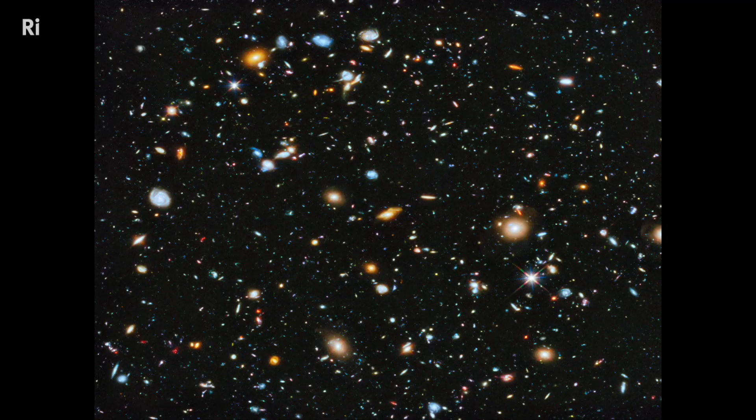The Big Bang - this is the moment at which the universe as we know it was born, and the moment at which each one of us was connected to each other atomically, and to the rest of the universe atomically. One of the fundamental laws is the first law of thermodynamics, and it really thinks big: that the amount of energy needs to remain constant.

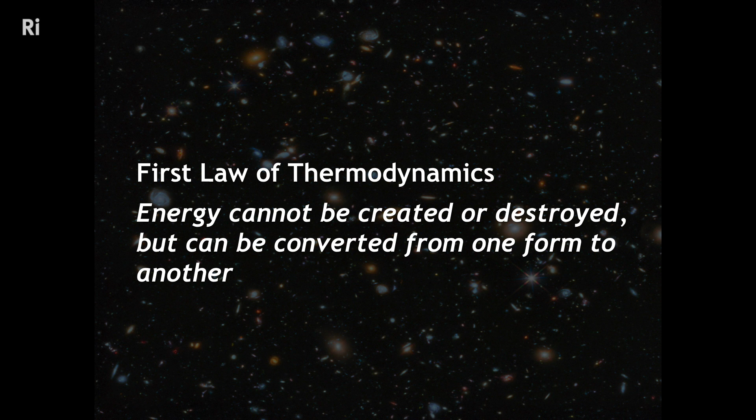It says that energy cannot be made or destroyed, but it can be converted from one form to another. And it's this idea of conversion of energy that brings us here tonight to discuss devices like batteries, that allow us to store energy in a chemical form and then transform that chemical energy into electrical energy as and when we need it.

So before we delve into the geography of battery cells, let's take just a short history of how these batteries were developed. The term battery was first coined by Benjamin Franklin.

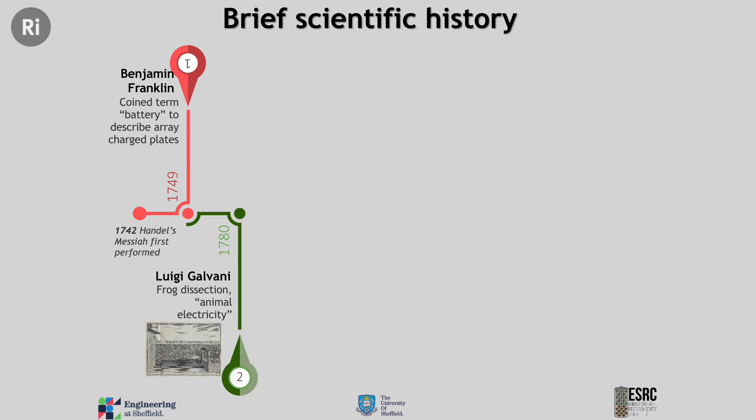And it was in the backdrop of US independence that there was an experiment carried out that really shocked the world. Galvani, an Italian scientist, had long thought that there was a link between movement and electricity. In one of his experiments, he connected a lightning rod to a frog's leg and then waited. When lightning struck that rod, the leg moved. This really shook the scientific world, and it also influenced Mary Shelley at the time, who was writing her novel Frankenstein.

Now, it was shortly after this that Volta started thinking: okay, Galvani thinks that this electricity is intrinsic to this frog - what about this electricity being intrinsic to metals?

And he started looking at combining different metals together, connecting them, metals like iron and zinc, to see if you could elicit some electrical current. And sure enough, he did. It was this discovery of bimetallic electricity that formed the basis for his innovation, the voltaic cell.

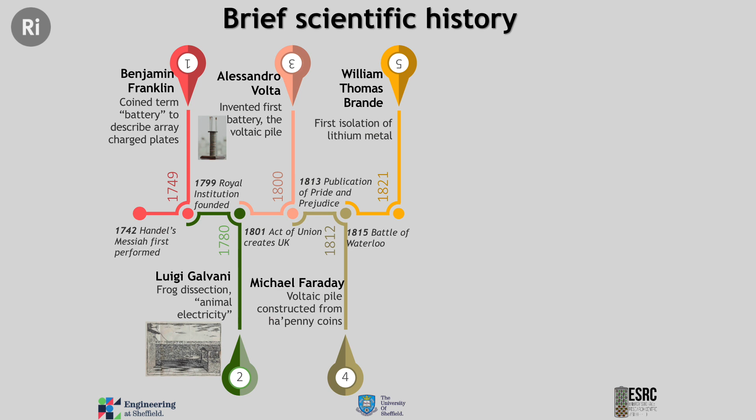This is a picture of a voltaic pile, and this is housed here at the Royal Institution. And this inspired Michael Faraday, who looked at voltaic piles and started to construct his own. In his first experiment, noted here at the Royal Institution, he constructed a voltaic pile from halfpenny coins.

And in 1814, Faraday visited Volta in Italy, and Volta presented him with a voltaic pile, which is the one that's housed here at the Royal Institution. It's such a beautiful example of shared scientific discovery and knowledge.

Around about the same time, again at the Royal Institution, was the first isolation of metallic lithium - lithium, this is the name that gives itself to the lithium-ion batteries that we use today. And at the same time in history, electromagnetism was taking off.

Inspired by this, Faraday looked into electromagnetism in a bit more detail, and conducted a lot of experiments to try and understand this further. In one of his experiments, which I show here, he had a long wire sitting inside a glass vessel that had a little bit of mercury metal in the bottom. And on the bottom of that glass vessel, there was a magnetic bar.

By connecting this setup to an external battery and charging that electricity through that wire, that set up a magnetic field along the wire. That magnetic field interacted with the bar magnet, and that set up this wire to move in a cyclical motion. That was the birth of the first electric motor.

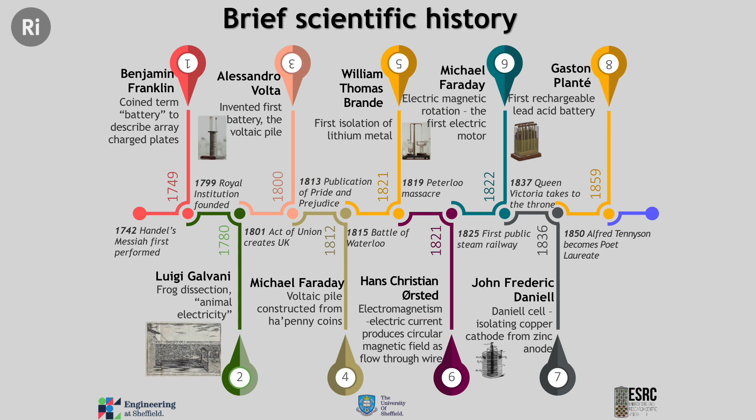Following on from that, there were further discoveries in batteries from John Daniell, a British scientist who had made the first Daniell cell. And then following on from that was the discovery of the first rechargeable lead-acid battery. This was by Planté, and this was used to light lights in carriages at the time, and of course now in cars it's used for ignition as well.

It was Faraday who had really looked at this link between chemistry and electricity. And looking at the work that he did and the work from Coulomb, we can really start to understand electricity and chemistry, and start to think about things in a quantitative way.

Here I've just shown an image of Faraday's lab here at the Royal Institution, and also a picture of Faraday giving his Christmas lecture in this spot, because I thought that was a really sweet picture to show tonight.

So Faraday, through his laws of electrolysis, had looked at how we can measure, we can think about electricity and think about the mass of materials that are involved in these sorts of transformations in electrolysis. And from that, we can work out quantitative information about our batteries. For example, the capacity of a battery.

We can think of that as a measure of the charge that the battery can store. And this really depends on the mass of what we call active materials. These active materials are things like electrodes, and it was Faraday that gave us those names: cathode, anode, ions, cations, and anions, and electrolytes. We can think of capacity as sort of the maximum amount of energy that can be extracted from a battery under certain conditions.

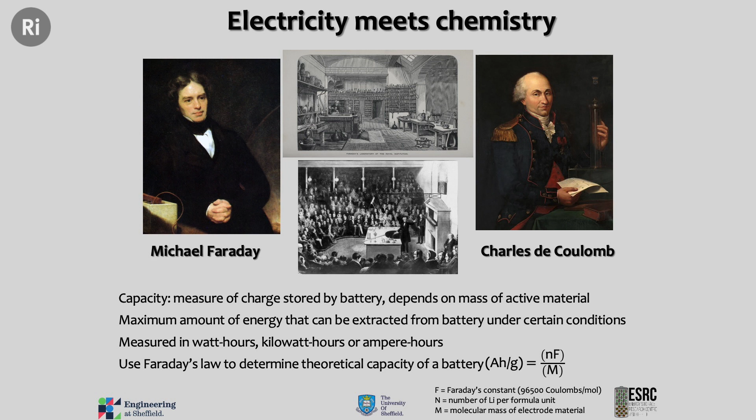And we can measure this in a number of different ways, and we're going to hear about that later in some of the next talks. And we use, in our own labs today, we use Faraday's law of electrolysis to work out what the theoretical capacity of a battery material may be. And we strive to work towards achieving that theoretical capacity.

So tonight's talks are really focused on lithium-ion batteries and lithium-ion battery chemistry. So we should look back over some of the key papers that brought about this wonderful discovery that powers our electric vehicles increasingly, our portable electronics.

And one of the first publications here that I'm showing is from Lewis, a very famous chemist, who had looked at the potential of the lithium electrode. And some work had been started then in 1913 on lithium batteries, but the first lithium batteries were not commercialized until the 1970s.

In the 1970s, there was the first publication of electrointercalation, so the movement of lithium ions into and out of a material. And this is by Stanley Whittingham, who'd looked at titanium disulfide materials.

This was very quickly followed by the pioneering work of John Goodenough, who had discovered lithium cobalt oxide, a material that's still used in our batteries today, which facilitates the movement of lithium into and out of these structures.

He'd done this work at the University of Oxford at the Inorganic Chemistry Laboratory, which you can visit and see this blue plaque dedicated to him. And in the 1990s, Sony commercialized lithium cobalt oxide batteries.

Very quickly followed reports of spinel-type materials, manganese spinels, and iron-based phosphoolivine materials. And this sort of research area remains extremely vibrant and exciting even today.

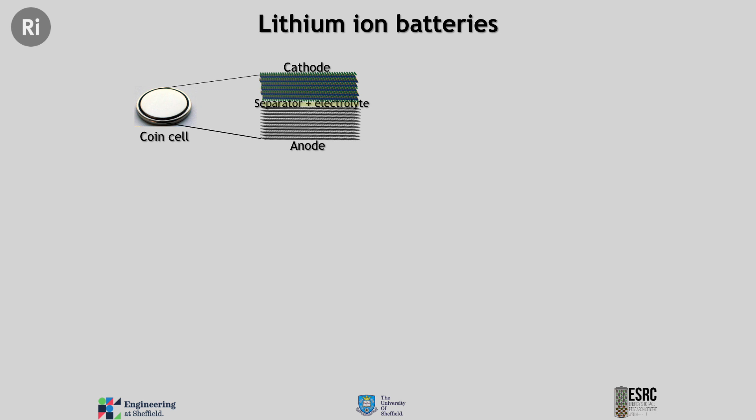So let's look at a lithium-ion battery cell in a little bit more detail, and we can break it down into its component parts. So this is a picture of a typical coin cell, which you may have seen in some of your devices. It's made up of a cathode, which is our positive end of the battery, an anode, which is the negative end, and then there's a separator that keeps the two apart. And between those, there's something called an electrolyte.

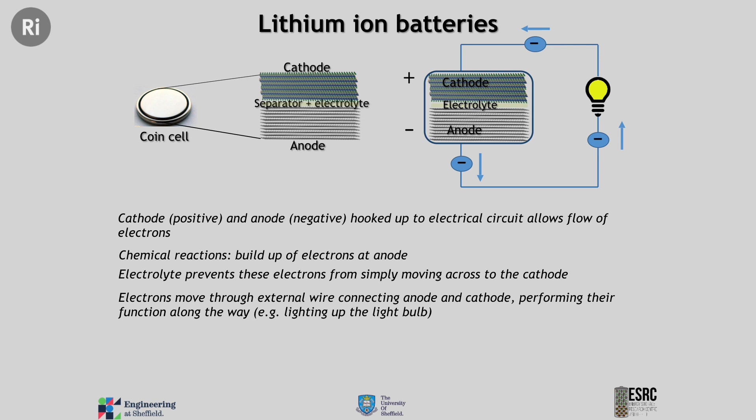What does the electrolyte do then? The electrolyte is what permits the flow of lithium ions in a lithium-ion battery. So it's ionically conducting, but electronically insulating.

Each one of those elements plays a specific role in that battery. The nickel increases the capacity. Remember, that's the charge that our battery can store. But when you increase that nickel content, there are some challenges and complexities in the synthesis of these materials.

The manganese provides structural stability, but it does so at the expense of the capacity of the battery. And then finally, we've got cobalt, which improves the rate performance, but as we're going to hear later on, is costly, and there are ethical concerns with mining cobalt.

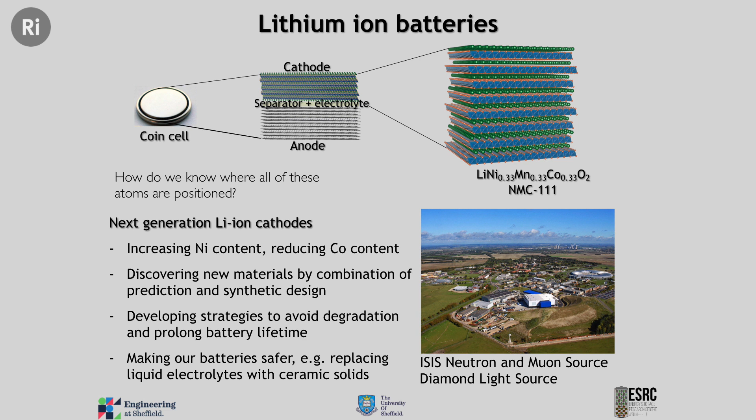So what can we do to try and mitigate these degradation processes? When we look towards the next generation of lithium-ion battery materials, and when we look at cathodes in particular, where are we moving to? We can increase the nickel content of these battery materials to try and up that capacity, try and reduce the cobalt, maybe even completely eliminate it. We can try to discover new materials by combining computational insights from calculations with synthetic design procedures to come up with a new family of materials. We can design strategies that avoid degradation and prolong battery life. And how do we do that?

Well, sometimes we can form a protective coating around our NMC material, and that will protect it from some harmful species that might erode it over time. Or, as crystal chemistry engineers, we can start to mess around with the atoms that are present, take one or two out and replace them with an element that might keep that framework structure nice and stable over multiple cycles. We could also look at making our batteries safer. These electrolytes I've talked about up to now are liquid-based electrolytes, used in your mobile phones and laptops. We could maybe move from liquid electrolyte systems to solid electrolytes and ceramics that provide greater safety and allow you to operate at higher voltages.

So as we're moving to these next generation of lithium-ion cathodes, we have to start to think about where we're going to source these raw materials from. And I think this is the perfect time to start handing over to Simon, who's going to discuss the source of materials in a bit more detail. Thank you. Thanks very much.

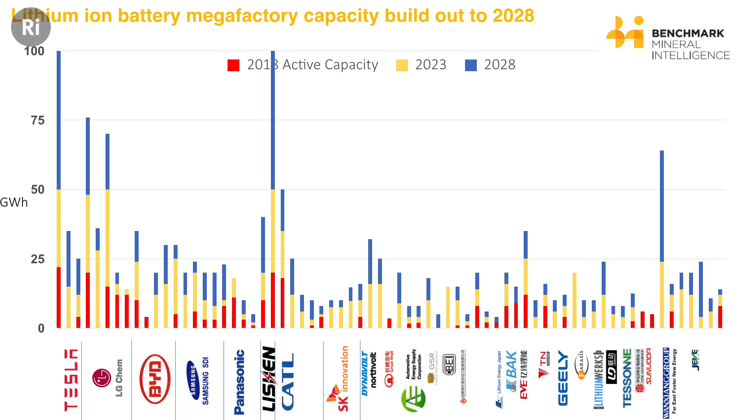This is where we're going by 2023. This is where we're going by 2028, and more of these plants are being announced as we speak. One last week was announced in India, which we haven't got on this chart. So that will intensify as the world needs more batteries. How many electric cars, pure electric vehicles, does that equate to? It's about 22 to 24 million. So when you look at these big announcements, like VW this morning announced they want to build 70 pure electric vehicle models by 2028, you realize that isn't a lot of batteries. We're going to need a lot more.

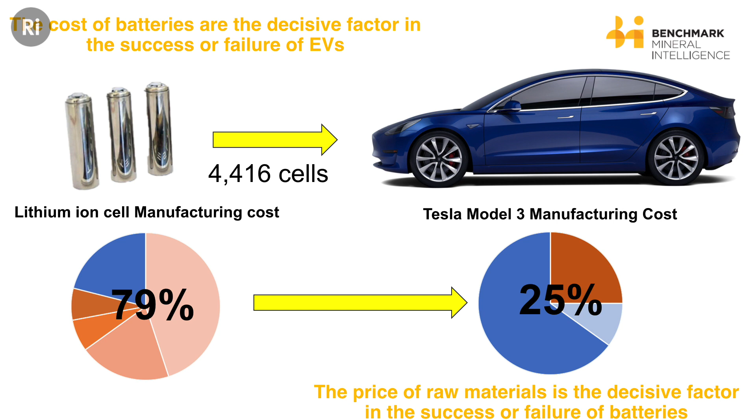So big statement number 2: the lithium-ion battery supply chain are the oil pipelines of tomorrow. What are the raw materials to watch? We like to call them the 4 horsemen of the ICE apocalypse. That's the internal combustion engine, ICE, which is the cars on your road.

Actually, the majority of feedstock now comes from traditional hard rock mining in Australia. That's your traditional mining where you can get a rock concentrate. That gets shipped to China, and is then processed into battery lithium within China.

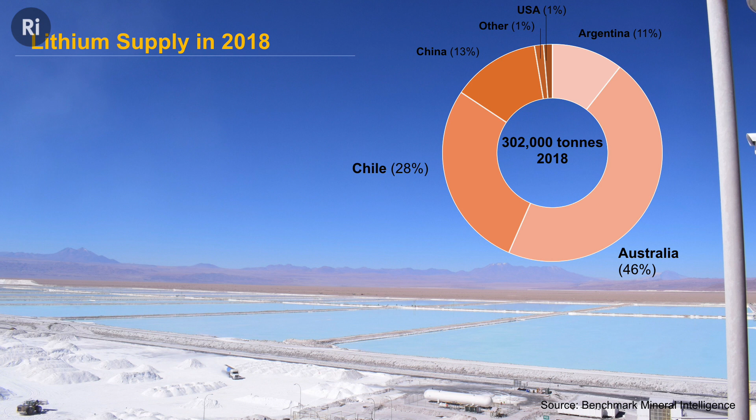Again, the key thing to understand is lithium is a very small industry. Last year, 300,000 tons, give or take, were produced. LCE, this is lithium carbonate equivalent. But all the commodities you're used to hearing about, coal, copper, oil, are in the millions or tens of millions of tons. So lithium needs to get to well above 1 million tons by mid-2020s to keep pace with demand. I don't think it's going to do that, but the point is it has to go from niche to mainstream, and it's not a commodity, it's a specialty chemical, which complicates the supply chain a little bit more. So this is lithium demand.

This is a big boy, Andy Miller. I put this in because his mum's here tonight. Andy Miller isn't with us, he's over in the US, but I thought Catherine would like that.

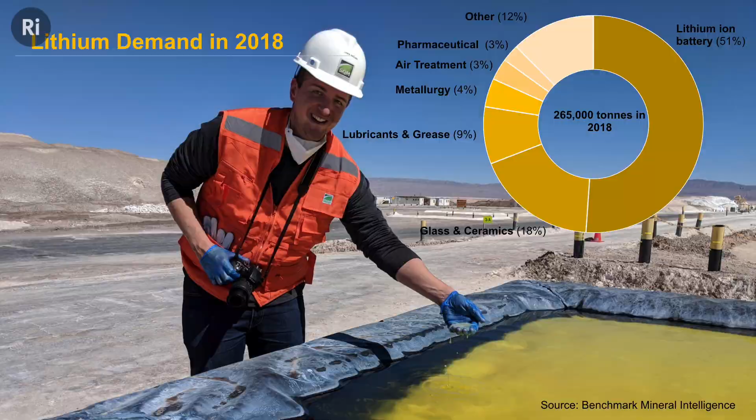Again, from a demand perspective, look to the right-hand portion of this pie chart. Lithium-ion battery, 51%. It's important to note that now with these raw materials, it's the same for cobalt, it's similar for graphite, the battery end use is now taking over the majority of the supply chain.

Once you go past that 50% mark of this mineral being used in batteries, the industry, the producers, the supply chain recalibrate everything they do towards lithium-ion batteries. That wasn't the case before, so that's something to bear in mind.

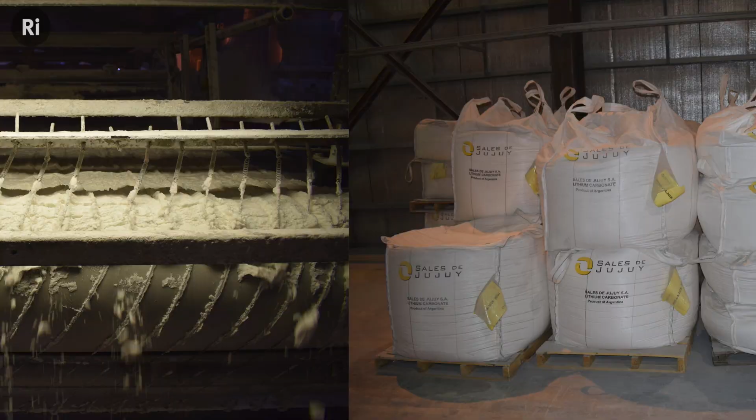Then they take the chemical out the ground. On the left, they turn it into a white powder, effectively - that's what lithium carbonate looks like. On the right, they bag it, and then send it to the Tesla Gigafactory, for example, where they mix it with the other cathodes, the NCM or NCA material, and then it goes into a battery.

The reason it's complex and difficult is there were 5 stages - more importantly, there were 15 steps to get lithium out of the ground and into an electric vehicle. So there's 15 steps for it to go wrong, 15 ways to qualify that material, 15 hurdles it has to go over, so it's not straightforward.

As a result, price volatility is now the norm. Lithium's price has increased 4x. It's come off since, but still remains high. And that's the same for cobalt and other raw materials going into a battery. There's a lot to talk about. Thank you for your time.

So really picking up from where Serena left off, all of that wonderful electrochemistry that drives the storage and release of energy takes place in the form of a rather dull-looking particle about 5 microns across that's kind of black or grey. I've got some examples here. It's really nothing special to look at if you're not looking at it through a microscope. And if you wanted to try and get some power out of that, attaching leads and crocodile clips to those tiny particles is a bit tricky.

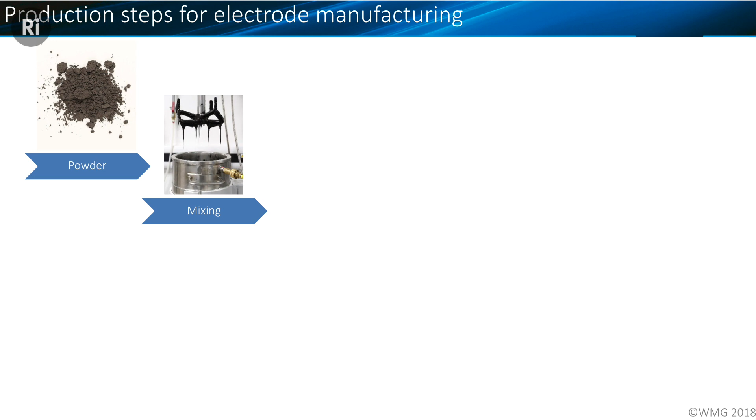So what we do first is we take our powder and mix it into an ink, and we mix it with carbon black typically, which is a nice conductive additive that links the electrical current all the way from the particle to the foil. And we'll mix in some binders - that's basically an adhesive that makes the carbon stick to the foil.

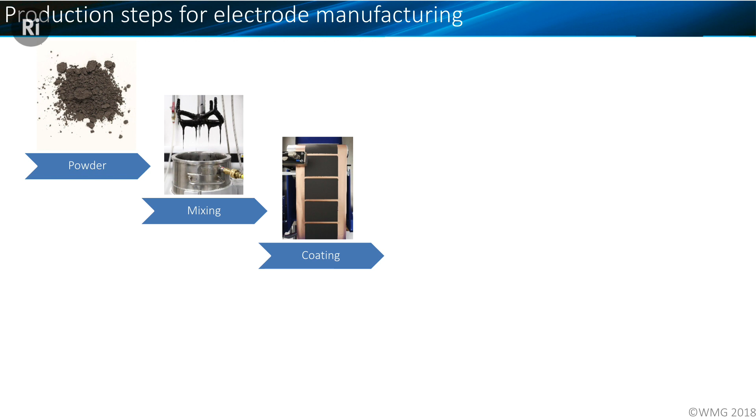Then we use a solvent which makes it liquid so that we can start to print it, and we're going to dry off that solvent. As we dry the solvent off, it's going to leave porosity behind it, and that gives us that beautiful microstructure you saw earlier. So we coat - I'll show you a video of that in a moment - on a reel-to-reel coater. To make the kinds of volumes we're talking about, this has to happen at very high speed. I'll show you some more details in a minute.

This is something that has to run on a continuous process line at about 120 meters a minute to be able to make the quantities of batteries that we need. And then we have to dry off the solvent, and that actually takes a tremendously large amount of energy.

The solvents we use for our anode are typically things like water. They're quite benign. But at the moment, we don't really have any good solvents for cathodes that aren't fairly unpleasant. We use a substance called N-methylpyrrolidone. Brilliant solvent, really horrible for health. So we have to be very careful how we control that in an industrial environment.

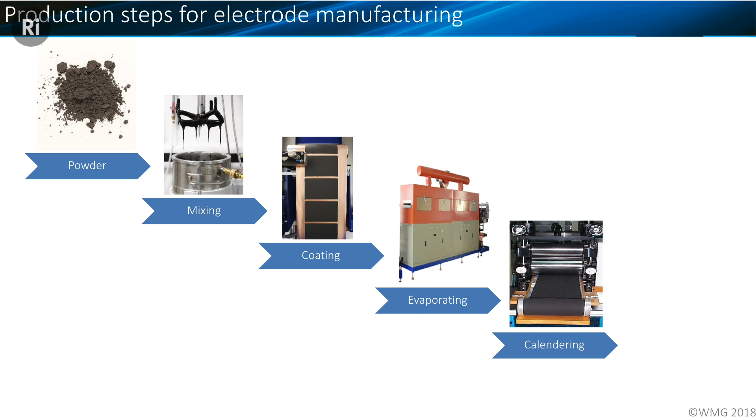And then we do something called calendering. We run that very carefully coated microstructure through a world's biggest mangle. What that does is compact it all down and get a bit more density in there, to give us a bit more energy storage, before finally we chop it into pieces.

Once it's chopped into pieces, we can assemble it into cells, and we can assemble those cells in one of two typical formats. We can cut them into big sheets, like rectangular sheets, typically about the size of an A5 or A4 book, and stack them like a lasagna. We're trying to get as much contact area as possible between the anode and cathode sheets, with separator layers in between. If I cut them as rectangles and stack them lasagna style, I get something I call a pouch cell.

The other way we can do this is print it onto very long, thin strips and roll those strips together. That makes a cylindrical cell, of the 21700 sort that you saw in Simon's presentation.

But what we've got inside this cell, if I was to open it up, is our roll of materials, all tightly packed. Don't do this at home, by the way. At home, this is full of caustic electrolyte, and it will do you no end of harm. Do it when you make these in the lab for fun, and you don't put the electrolyte in.

But what you see in here is a roll, and in that roll, we've got the layers of anode and cathode material separated by this white separator material, a polymer separator material. And that simply gets dropped into the cell can.

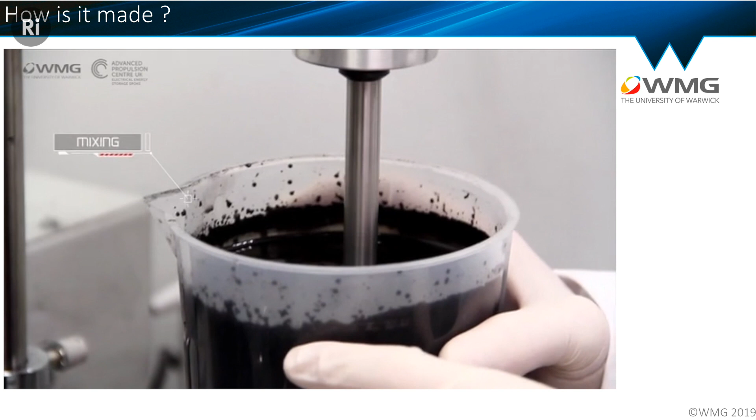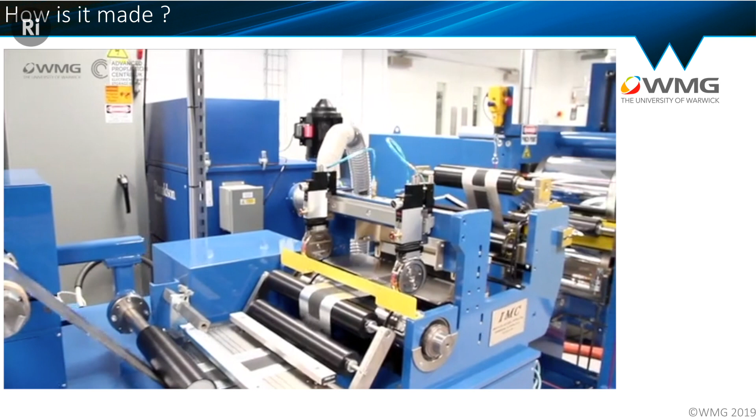Thank you very much. So what you can see here starts off with the mixing process. This is done in a lab environment. This is not what a factory looks like. So we're mixing up that ink, which is a bit like a kind of molasses type consistency. We then pour it into a reel-to-reel coater, where we lay that coating down onto a roller. We draw the foil up against it, and that draws off the coating to give us the coated foil that we're looking for.

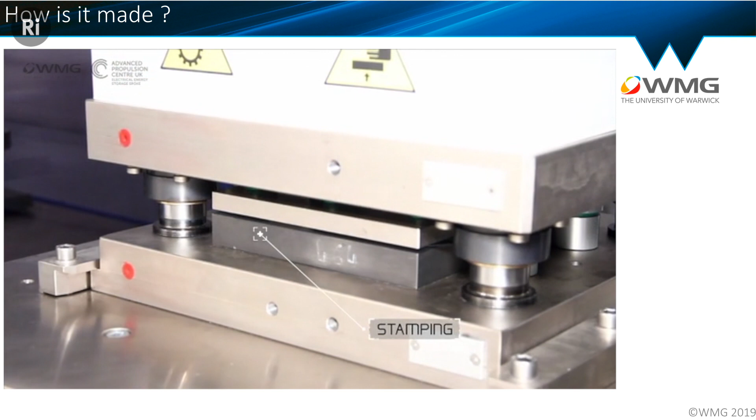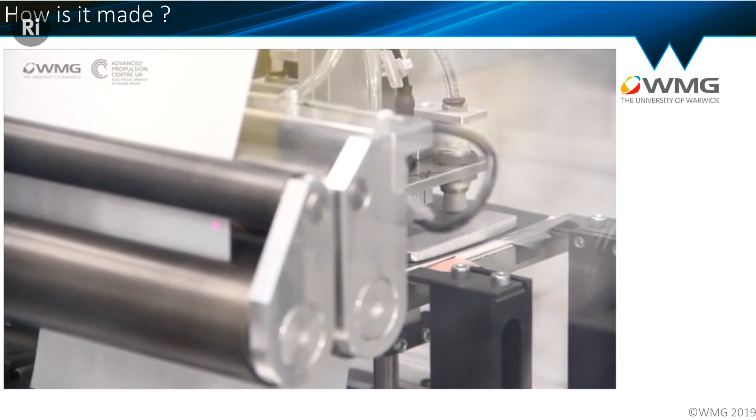The drying actually takes place in a closed cupboard that you can't see, and then we stamp the materials. We use a robot to assemble them because the alignment of those anode and cathode foils is absolutely critical to the quality of the battery. It's one of the things that can cause it to fail early in its life. We then seal it into a material which is actually very similar to a coffee bag. Coffee bags resist moisture for about 3 months.

That material resists moisture for about 15 years. And having done that with the electrolyte, we then take the thing off, ready to form. In our laboratory, we can make about 20 cells a day using researchers.

If you were to walk into a Gigafactory, you'd see individual lines producing something more like 20 cells per second. And that's one of our challenges.

We don't just put those cells directly into the car. We first have to put them into sub-assemblies which are manageable. So we take our cell, whether it's a pouch or a cylinder, and we assemble them into things called modules. These are really just sub-assemblies. And what we're trying to do at this point is to keep the voltage of each of those sub-assemblies below about 60 volts, so it's relatively safe to handle.

We're trying to keep the mass down to about 50 kilograms or so that it can be handled in a factory environment. And ideally, we want that module to be reusable across many different electric vehicle types so we can get some economies of scale out of its manufacture.

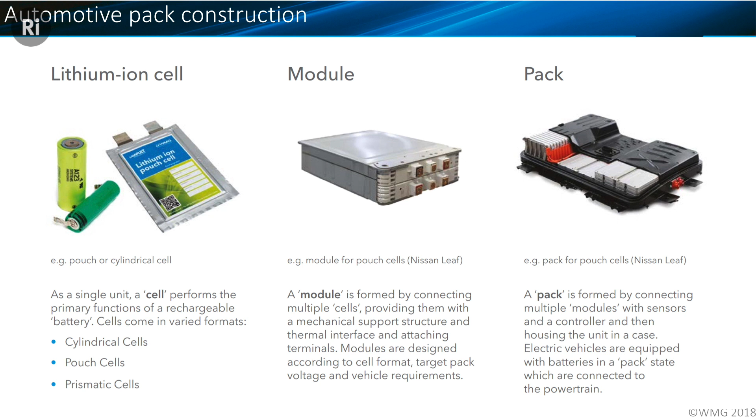Then we'll join those modules together to make the battery pack. The battery pack, you can see the Nissan Leaf one on the slide behind me, typically covers the whole floor of the vehicle, and typically weighs somewhere between 300 and 900 kilograms. So it's a fairly substantial piece of equipment. And then that gets bolted underneath the vehicle, typically on the production line for the car.

The fact that that pack is large, it's heavy, it's hazardous goods, means that there's a lot of benefit to doing the assembly of that very close to where you do the assembly of the car. And that's important for us, for reasons I'll come back to in a moment.

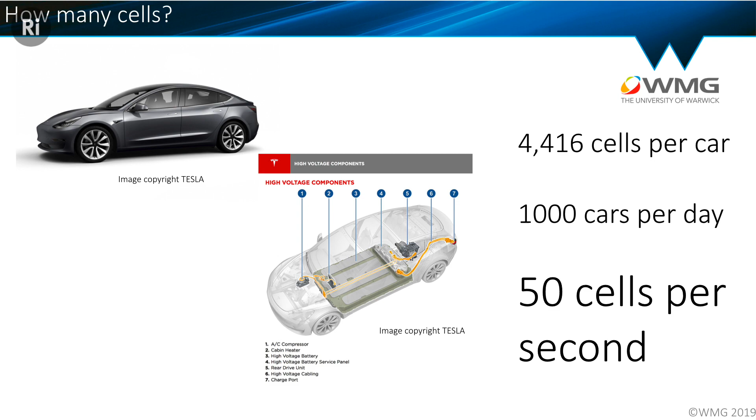As Simon said, our Tesla Model 3 has about 4,400 of those little cylindrical cells inside it. And Tesla's finally reached its magic number of about 1,000 cars per day in manufacture. If you want to multiply that up, that means that just to produce one model of car, that factory has to produce 50 cells every second.

And given that, as well as the Model 3, they're also making the Model S, the Model X, and a whole bunch of other stuff besides, the Gigafactory that's there doing about 20 gigawatt hours today is doing about 125 cells per second.

The fastest miniguns that get connected to helicopters by the RAF for shooting at targets, the very fastest that have ever gone to production are about 125 rounds per second. It just gives you an idea of the rate these factories have got to be operating at. And that's how you get to things like the Gigafactory.

It takes about 4 billion of investment just to get to the point we are today, to do 20 gigawatt hours. And as Simon said, this is only about a third of what Tesla want to be doing in the long term. And that's already a 200,000 square meter facility with about 3,000 staff. So it's a fairly significant industrial endeavor.

It's also a massive commercial opportunity, whichever way you look at it. The reason the UK is interested in all of this is that the UK at the moment has a very good industry in cars, and particularly in making engines. We make about 1.7 million vehicles and about 2.4 million engines every year. And the engine is about a third of the value of the car, the bill of materials cost.

But when we move to an electric vehicle, we replace the engine with an electric motor and some power electronics, and that costs about the same as the engine. Then we put a battery in place, and that costs typically 3 to 5 times the cost of that engine, and then we put the rest of the car on top of that.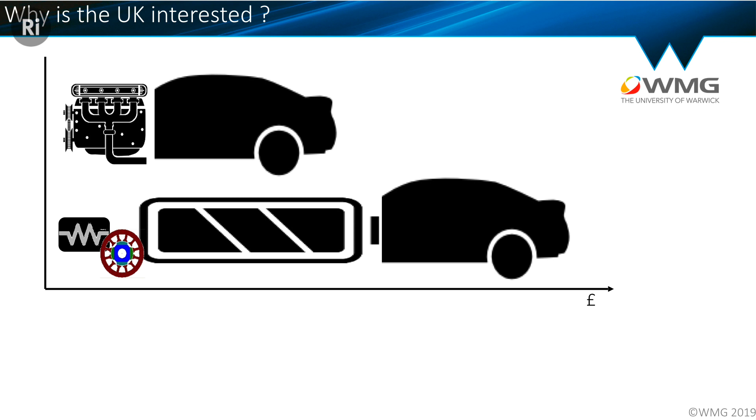So there are two things you'll notice. The first is the total cost of our vehicle has gone up significantly. The second is that nearly 50% of the bill of materials cost for a long-range electric vehicle is embedded in that battery. If we see that as a bought-in component, that's outsourcing an enormous amount of the value creation that happens in the car industry in the UK today. So economically, as well as technically, it's important for that to be a component that we have the ability to deliver.

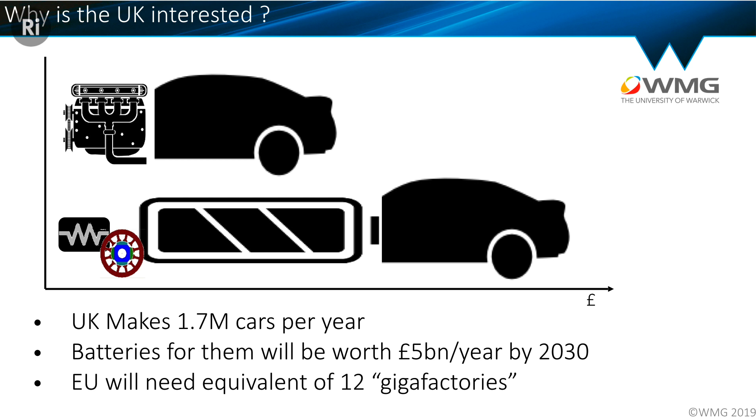If we look at the kind of volumes that Simon's slide showed, around what we've got to get to by 2028, 2030 across the EU, we're going to need the equivalent of about 12 of those gigafactories at the size they are today. To supply the UK industry domestically, that's space for about 2 to 4 gigafactories of that size. Actually, there are some good arguments that economies of scale suggest you want smaller factories, probably about 10 at half that size. So that's a big opportunity for the UK.

In response to that, the Faraday Challenge and the Faraday Institution, which has sponsored today's event, has been set up to accelerate the UK's research efforts, our innovation, and our industrialization of batteries, going from the achievements of Goodenough in the 1980s as the inventor of the lithium-ion battery, to try to place us in the position where we've got large-scale manufacturing and exploitation of that technology coming from the UK.

And that journey takes place over an enormous range of length scales. The kinds of scientific development that Serena's talking about typically happen at the scale of milligrams or grams in a laboratory. As we look to see whether they work in the context of a cell, we work in laboratories like ours at the kilogram scale, building 20-odd cells a day. And by the time we get to the scale at the far right-hand side, which is our gigafactory, that's a kiloton per year of materials that we're processing.

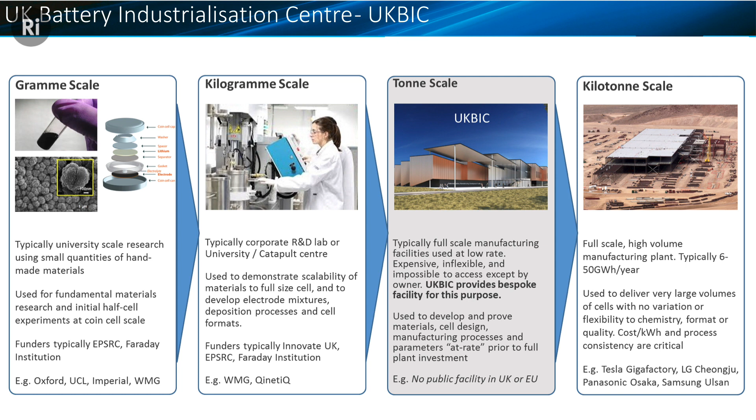To make that jump from laboratory into full-scale factory, what you need is the ability to trial those manufacturing processes. If you're going to be making 50 cells a second, you want to make sure you're making them right, because if you're losing money off them, making more is a really bad idea. So what we need here in the UK is a facility that lets us look at that manufacturing journey as well as the scientific journey.

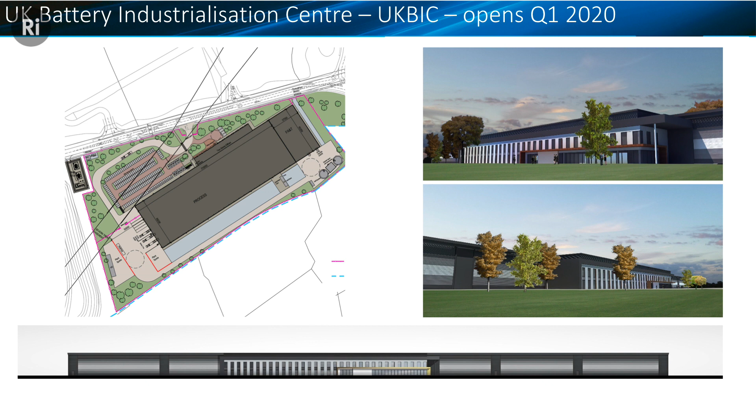And a part of the Faraday Challenge is the construction of something called the UK Battery Industrialisation Centre, being built in Coventry, not very far from my own institution at Warwick. That's a 20,000 square metre facility, about one-tenth the size of a gigafactory, so it's still a pretty significant endeavour. It'll have the ability to do about 1 gigawatt hour per year manufacturing capacity.

That allows material suppliers, manufacturing companies, and car companies to start designing cells, designing new manufacturing processes, and bringing new materials forward to market. What we hope is that this gives a springboard in the UK for a large-scale manufacturer to set up, to link into the R&D and development efforts here, and start to supply some of the major OEMs we've got based in the UK. And that, I hope, is a good opportunity to hand over to one of the major OEMs we have here in the UK. Thanks, David.

Thank you very much, and thank you to the previous speakers. I think this is perhaps one of the most exciting bits of the presentation this evening - it's really how the battery comes to life. So we've seen the raw materials, we've seen what a battery is, we've seen how it's made, and we've seen what it will take for a Gigafactory to come to the UK.

My job at Jaguar Land Rover - I'm Global Purchase Director for Electrification. My role is very much linked to what Dave's just been talking about, buying the batteries from these Gigafactories all over the world on behalf of JLR. The picture behind me is the base of an I-Pace. If you took off the body, the seats, the doors, that's what you'd see left over. The main bit in the middle is the frame, which contains 36 modules. They then contain 12 pouches, which is what's driving the overall 90 kilowatt-hour battery you can see in there.

So just to start with a question - how many of you in here this evening have ever driven or travelled in an electric vehicle? Okay, that's not a fair...

Anybody want to shout out, what was your experience? What did it feel like to be in an EV compared to a normal petrol or diesel? Silent, quiet, fast - yep, exactly. Those are all the words I would certainly associate with driving an EV. The silence is really noticeable, that sense of peace you can have in an EV. There's certainly none of that stop-start you get, particularly in city driving at the moment. And that sense of response - they are incredibly responsive due to the nature of the design of the vehicles.

It is quite hard, as I say, to describe that, but I've got a video which hopefully will give you a sense of what it's like to have an EV.

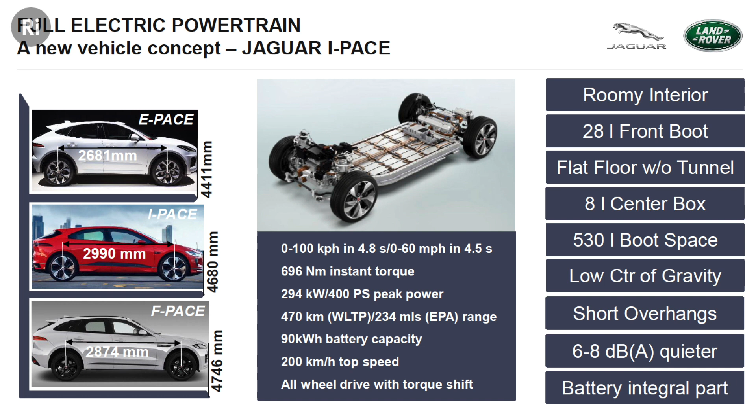It's also significant in terms of the amount of roominess that we were able to drive into that vehicle. How did we get to this point? Really, it demanded a significant change in the way that we engineered this vehicle within JLR. We're used to developing vehicles that have internal combustion engines, petrol or diesel, which then drive, in effect, a passive driveline. When it comes to an EV, we had to change the entire way that we engineered the vehicle, so it meant we had to have an awful lot more interaction between each of the centres of excellence across the organisation.

It meant that we had to integrate the powertrain into the whole vehicle. It's no longer an engine and individual drivetrains. We've got the battery pack that then drives the electric drive units that are integrated into the front and rear axle to deliver the performance you could see there. The high voltage batteries are integral into the vehicle dynamics, and they are scalable, as mentioned in some of the earlier presentations. Having those standardized modules is really going to be key for us as we move forward, looking at how to optimize the cost of these vehicles in the future.

In addition, we have to be very careful with the energy management of these vehicles and make sure that we can optimize those and have a fully integrated system so that the vehicle can be primed before starting use, or dynamically managing the battery output throughout the entire use of the day.

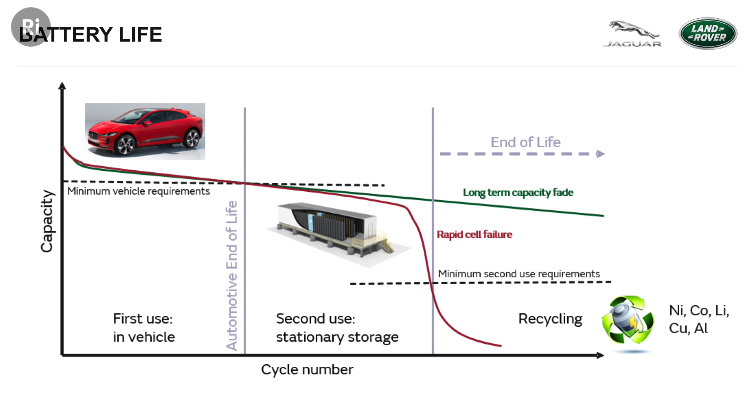And a battery - we've spoken earlier about what happens to the batteries. We've seen that some of the materials included in the battery pack are particularly challenging for us. The battery has a standard life that we can see here. The first use will be in the vehicle, and that will last for a particular amount of time. In the I-Pace, we warrant them for 8 years, 100,000 miles, whichever comes first. At the end of that time, it doesn't mean it then has to automatically go and be recycled.

And then it gets to the point where there is a challenge in terms of whether we go for recycling, taking those materials - nickel, cobalt, lithium, copper, aluminium from the busbars. Those materials all have a value, and it's important to take those back in, working with our partner suppliers, and feed them back into the supply chain so that we're not having to go and get virgin materials, and we can develop a closed loop system, which is ultimately what we're aiming to do.

In terms of future opportunities, I believe this is the first in a series of lectures here at the Royal Institution, apologies - the Faraday lecture. There is a further series of lectures which will go on about what EVs mean in terms of driving and challenging the way we build infrastructure for charging those vehicles, and for developing cities and what it means for urbanisation going forwards. So thank you very much for listening.